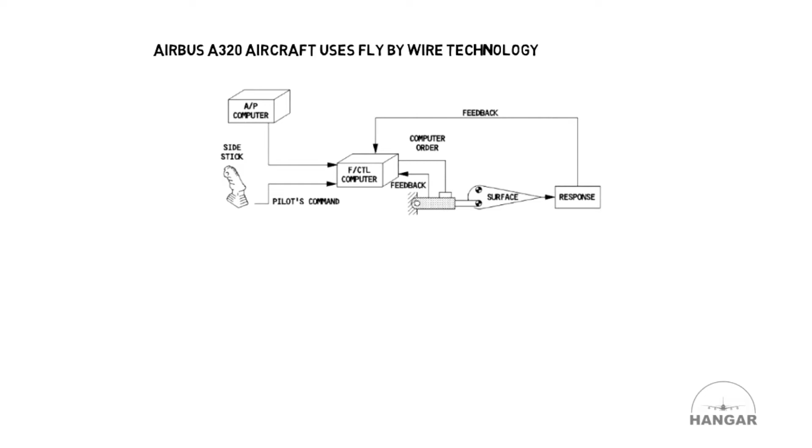The single aisle is the most advanced family of aircraft in service today and utilizes fly-by-wire flight controls. The A318, A319, A320 and A321 are twin-engine subsonic medium-range aircraft.

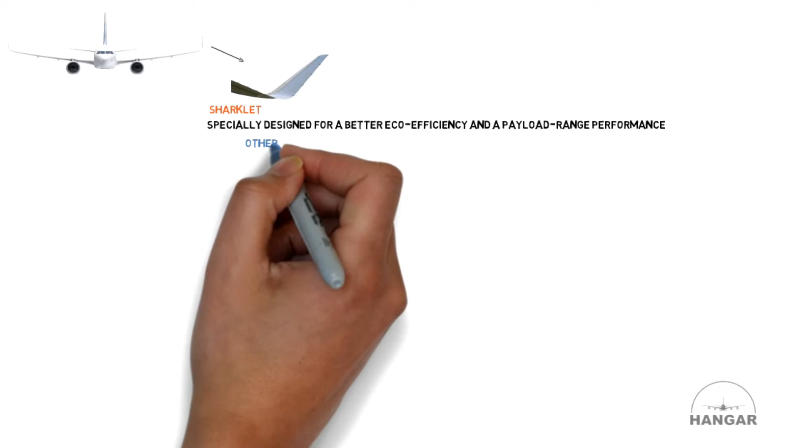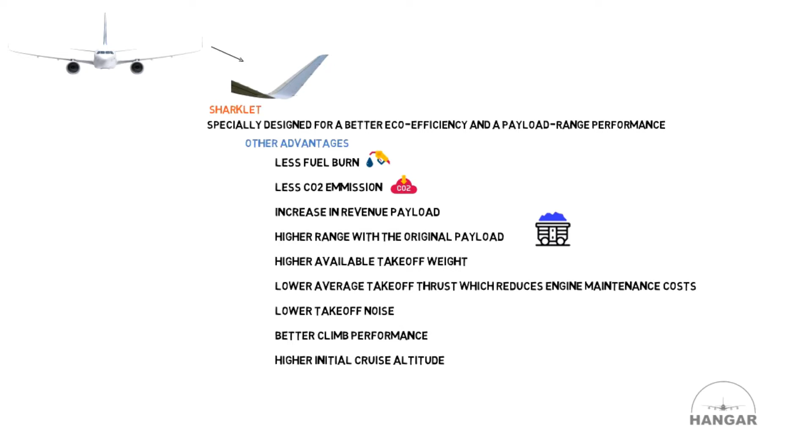Recently manufactured aircraft are equipped with sharklets, specially designed for better eco-efficiency and payload range performance of the A320 family. The sharklets also ensure less fuel burn, less CO2 emission, increase in revenue payload, higher range with the original payload, higher available takeoff weight, lower average takeoff thrust which reduces engine maintenance costs, lower takeoff noise, better climb performance, and higher initial cruise altitude. Next we will look at aircraft dimensions.

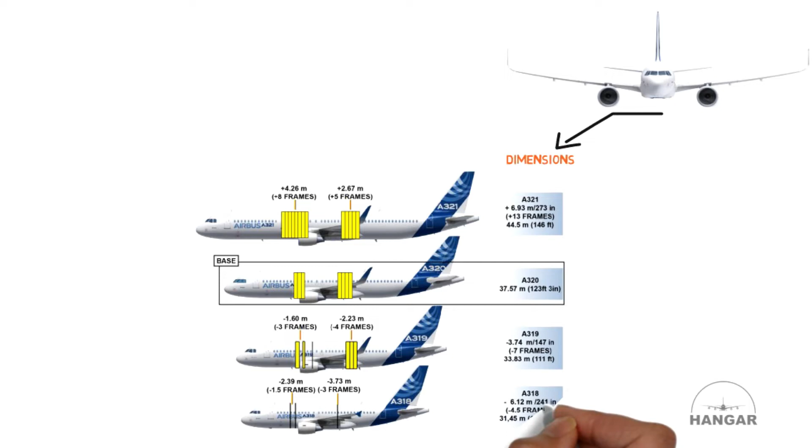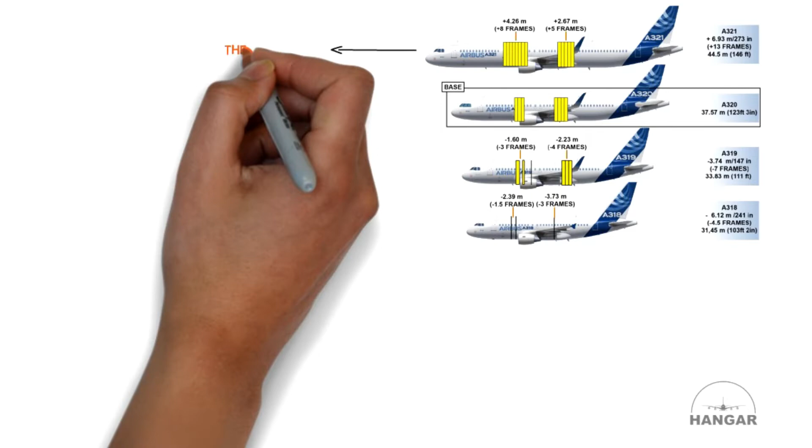When we talk about the cockpit, it has adjustable seats for 2 crew members, a 3rd occupant seat, and depending on the configuration, a folding seat for a 4th occupant.

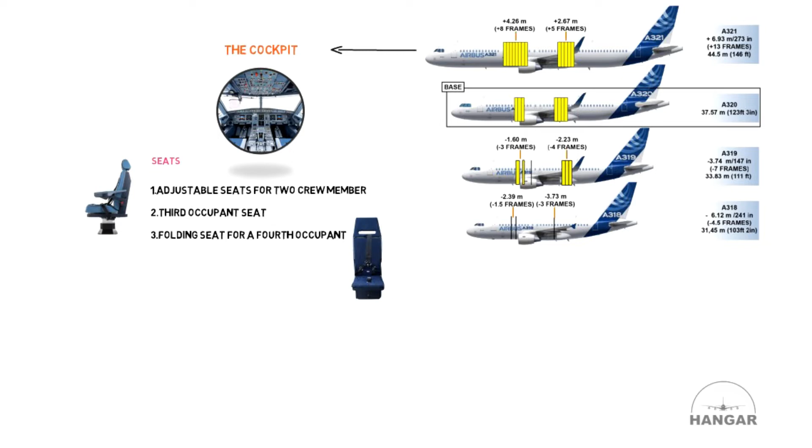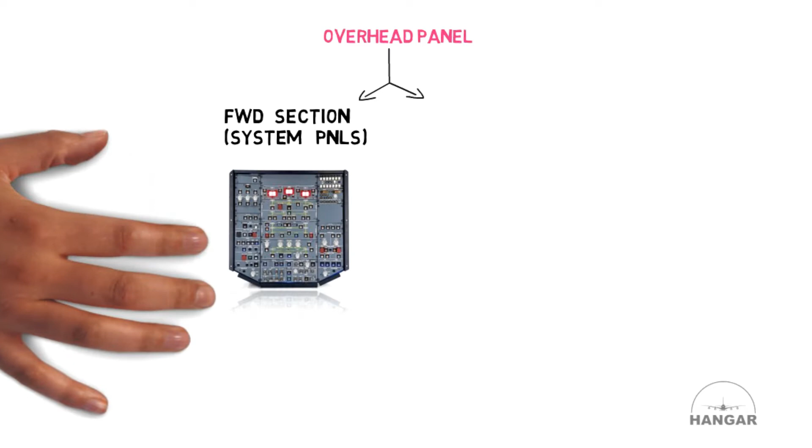The controls of most aircraft systems are located on the overhead panel. The overhead panel is divided into 2 main sections: a forward section including the system panels, and an aft section including mainly the circuit breaker panel.

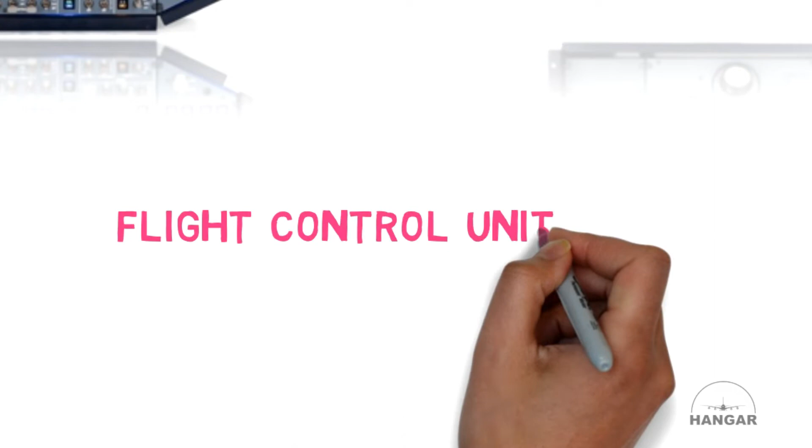The Flight Control Unit, FCU, includes the EFIS controls and is used for control and monitoring of the Auto Flight System, AFS. It is located on the glare shield. The Master Warning and Master Caution lights are also located on the glare shield.

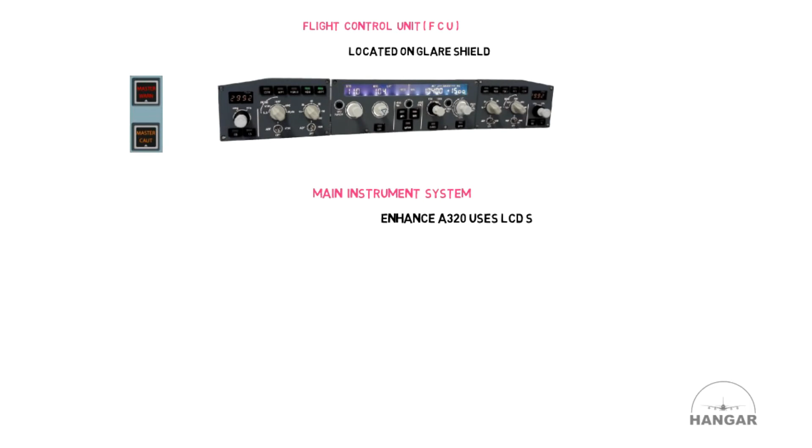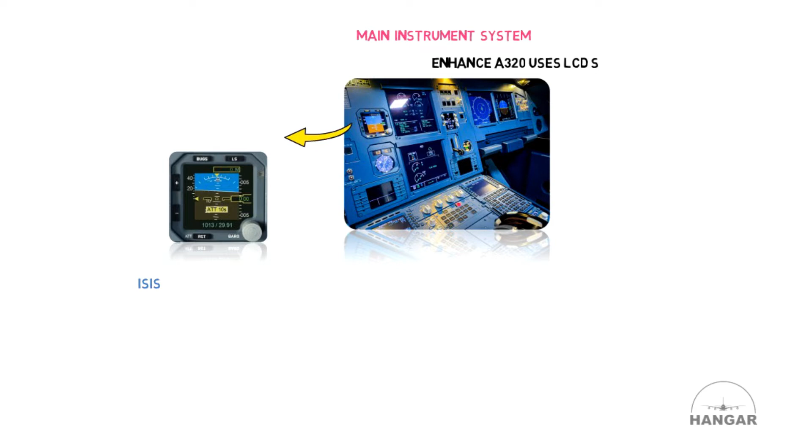The enhanced single-aisle aircraft main instrument panel instrumentation has been updated. Liquid crystal displays, LCDs, replace the existing CRTs. A single integrated electronic indicator, the Integrated Standby Instrument System, ISIS, replaces the standby instrumentation: standby horizon, airspeed indicator and altimeter.

The center pedestal ergonomic design of the A320 family aircraft gives the flight crew efficient access to multiple system controls without compromising safety. The center pedestal has a switching panel, an ECAM control panel (ECP), 2 multipurpose control display units (MCDU), 2 radio management panels (RMPs), 2 audio control panels (ACPs), thrust levers and thrust reverser levers, and a pitch trim wheel.

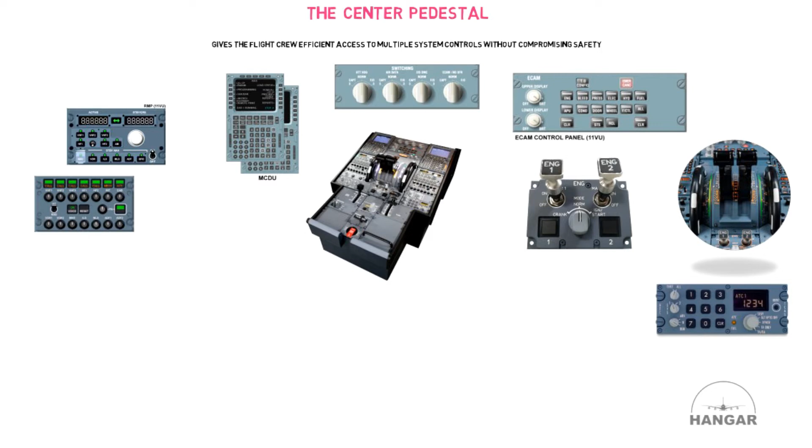Also on the pedestal: engine start panel, air traffic control and traffic collision avoidance system panel, flap and slat control handle, speed brake control panel, parking brake control panel, cockpit door lock panel, landing gear gravity extension handle, printer, multipurpose disk drive unit (MDDU) which is an optional feature, and PA handset at the rear of the pedestal.

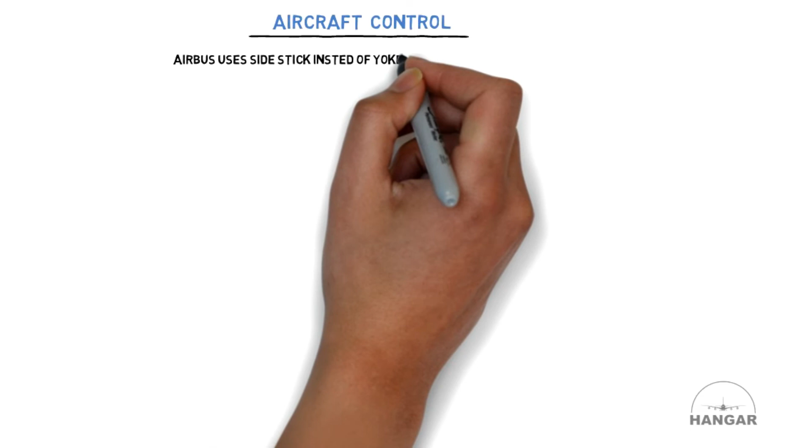The conventional aircraft control yoke is noticeably missing in the Airbus single-aisle aircraft. The side stick controller replaces the conventional aircraft yoke. There is 1 side stick controller for each pilot, mounted in the side consoles.

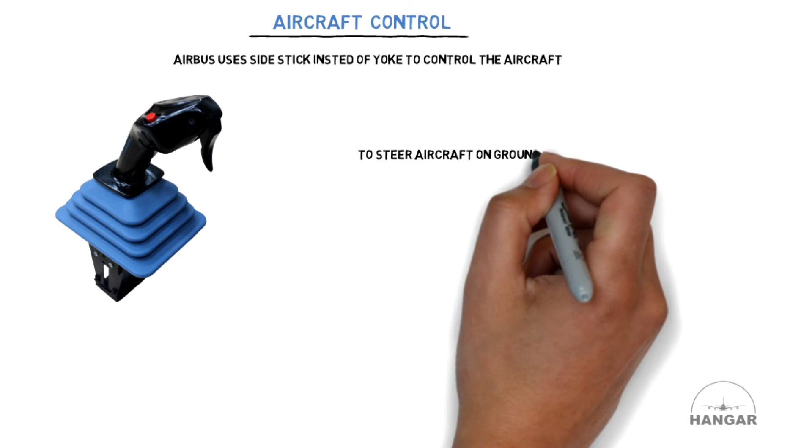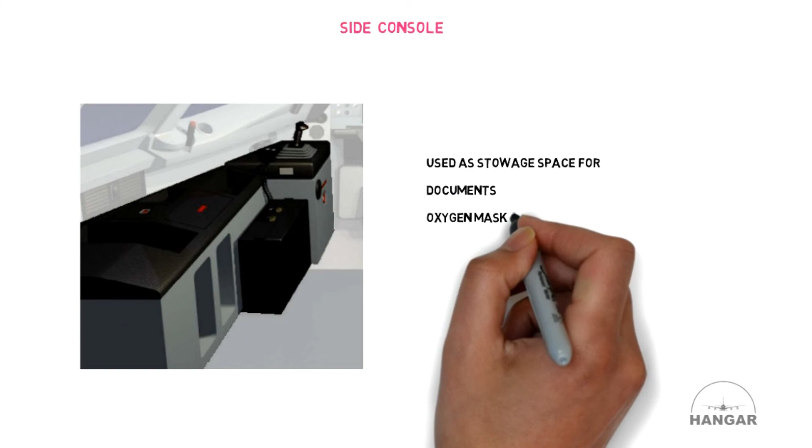The aircraft nose wheel is steerable. The flight crew operates the nose wheel steering using the nose wheel steering tillers mounted outboard of the side stick controller on the same side console. Behind the most forward side console are installed several other compartments along the outboard sides of the cockpit, used as stowage space for documents, oxygen masks, fire extinguisher, and microphone and headset connections.

Next we will look into the cockpit philosophy. When there are no failures, the system indicator lights on the overhead panel will not come on. This ergonomic design enables the pilots to immediately see when a system is faulty or has been manually shut off.

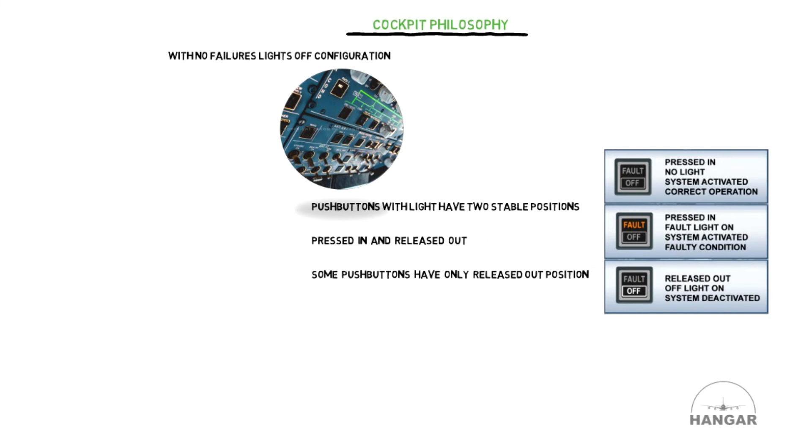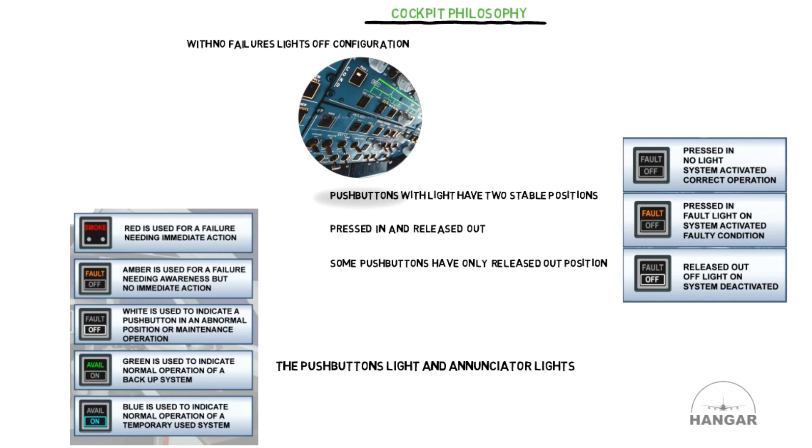Most of the push buttons with light have two stable positions: pressed in and released out. Some push buttons have only one stable position, that is released out. The push button lights and annunciator lights are in different colors according to their function. In normal operation, only green lights and, sometimes, blue lights come on.

Now we will consider some general items. If you are to tow the aircraft, you can tow it by the nose landing gear or the main landing gear. You can also tow the aircraft with deflated tires.

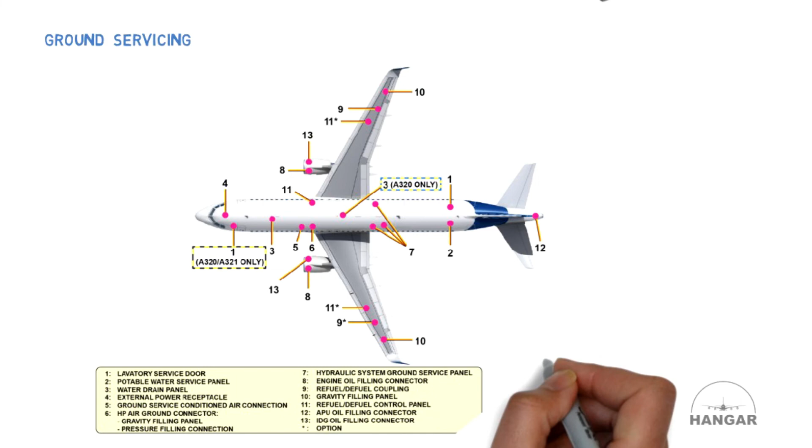When it comes to servicing, the ground service connections layout is the same on the Airbus A318 and A319. The main difference between the A320 and A321 servicing points is a second potable water draining panel at the center of the aircraft on the A320. So basically this is a brief introduction to Airbus A320.